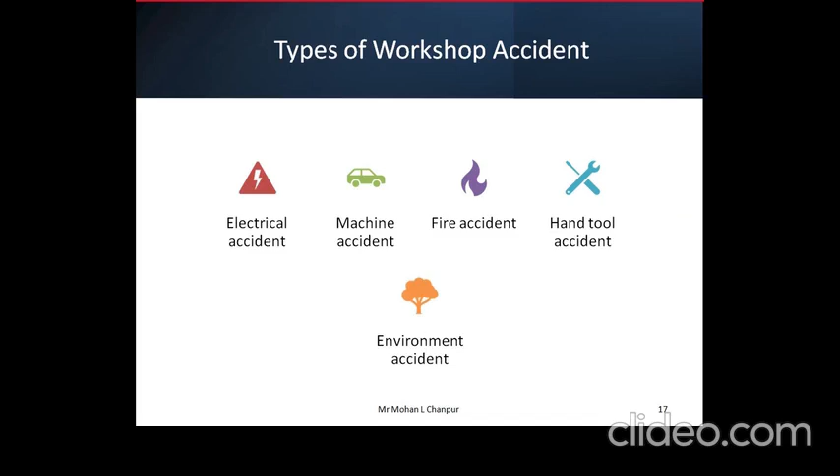Then, types of workshop accidents: electrical, mechanical, fire, hand tool, and environment. These are the five types of workshop accidents that normally occur in a workshop - electrical, machine, fire, hand tools, and environment accidents.

Next, workshop safety devices. I already told you about personal protective equipment (PPE). There are other devices in the workshop, like the fire alarm. A workshop should have a fire alarm, so if there is any fire, small or big, you should give an alarm so everyone gets alert. You find fire alarms in many places, like malls too, used to alert everyone that there is a fire at a certain location.

Then goggles and visors. Goggles are used when we are doing grinding or finishing of tools. Nowadays visors are also used to protect ourselves from coronavirus, which is common around us now. But normally visors are used in the workshop where welding is going on, or some dusty work is being done - there you can use a visor.

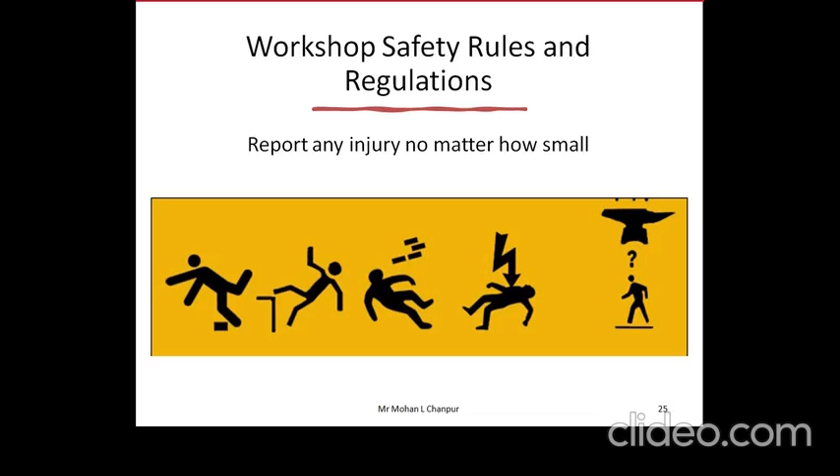Who is going to answer the first question? List the causes of workshop accidents.

Mechanical fault. Causes - failure to use safety devices, overconfidence, ignorance, lack of concentration, engaged in horseplay in the workshop, inadequate electrical faults. Thank you very much for your quick response.

Then state four types of workshop accidents. Electrical accident, mechanical fault, fire accident.

Good, thank you. The next question is list five workshop safety devices. Goggles, gloves, apron, shoes, fire alarms, safety shoes, fire blankets, fire extinguisher, boots. Excellent, now you are perfect with the safety.

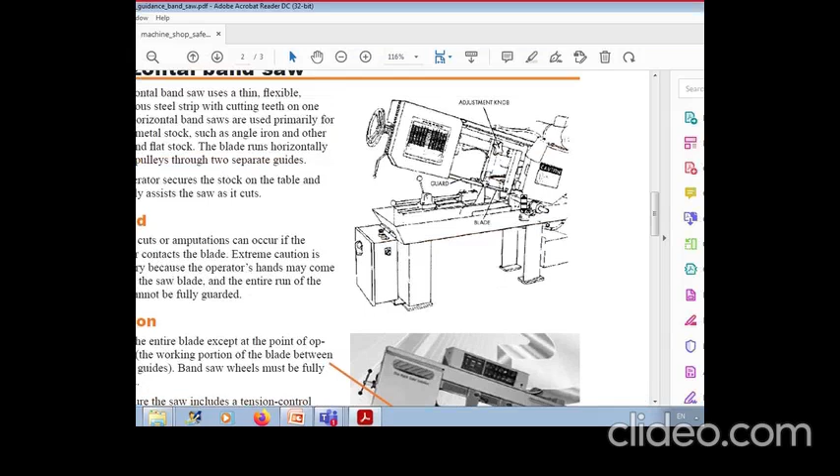But I will show you some pictures which are very important when we talk about accidents and safety. This is related to the bandsaw - we have one saw machine in the machine shop, a band saw where we used to cut big bars, plates, everything into short pieces.